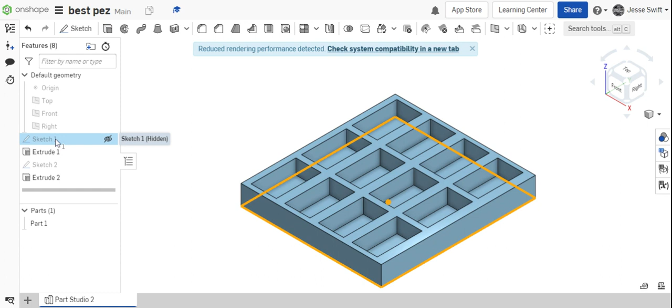So one of the things I need to know to make a lid for it, I'm going to go back to my original sketch and view that. And I need to find these dimensions so I can write them down. So it's 5.5 for width and... I guess 5.5 would be the length and 5 would be the width.

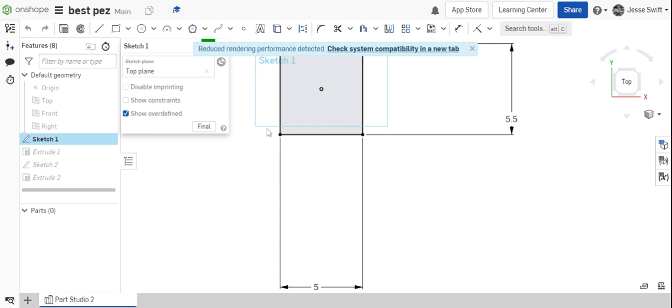All right, so knowing these dimensions, 5.5 and 5, what I can do is exit the sketch, and I'm going to start a new part. On this new part, I'm going to draw that exact same size. So sketch here on the top, and I'm going to use my center rectangle again. I'm going to click here, and I'm actually going to draw that out, and I need to dimension it.

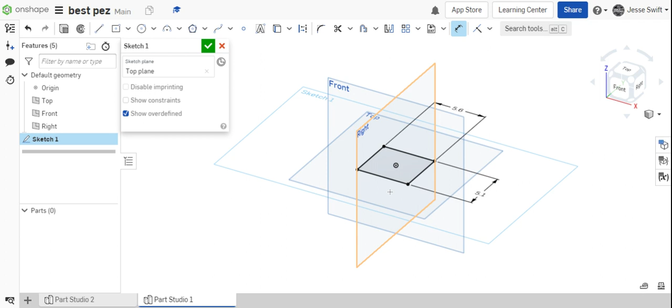So in this direction, it was 5.5, so I'm going to make it just a little bit bigger - 5.6, so it fits. And then in this direction, it was 5, so I'm going to make it a little bit bigger, 5.1. So now that should easily fit on top of my part.

All right, now I'm going to extrude it to be just a little bit thinner than what this one is. If I look at it, I think this is the extrude step, it's 0.7, so I want it to be just a little bit less. I'm probably going to use 0.5 for the extrude.

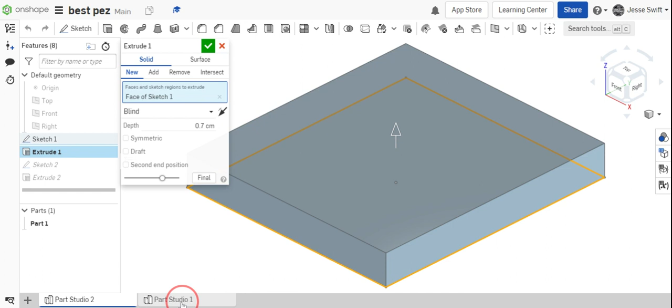So coming back to my part, draw my lid. I'm going to click extrude it, 0.5.

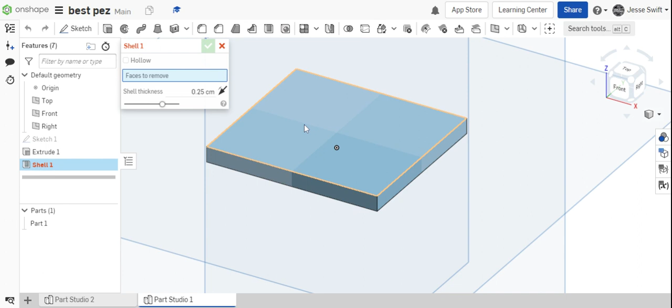All right, now that I've done that, I can use this tool called Shell. And what Shell is going to do is kind of hollow it out. Now I'm going to click Shell, and it says faces to remove - I want to remove this face. And you can see that it now made a box really simply.

But what I can do is also change the direction, because if I do it this way, that shelled it to the inside, and that would actually hit my bottom piece. But if I click the arrows, it will shell to the outside now. And I want to shell it - I want to say 0.15 is my shell, so that should be how thick that is.

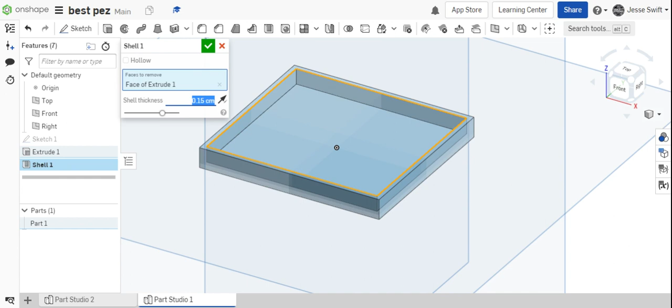Okay, now if I click OK, you can see that made a box super simply.

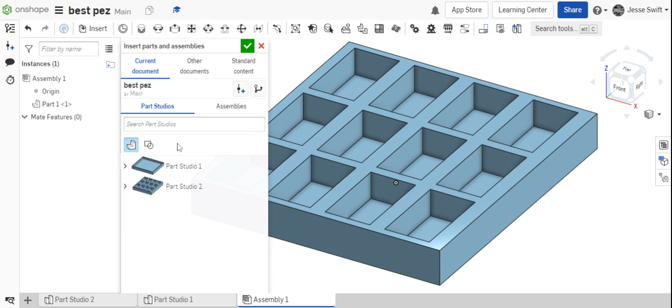Now that I have that, I can go to my assembly, and I can bring in my two different parts. So I'm going to insert my bottom, place it right there. And then I'm going to insert my top, place it there. And now I can take this and do some analysis, making sure that it's going to fit properly.